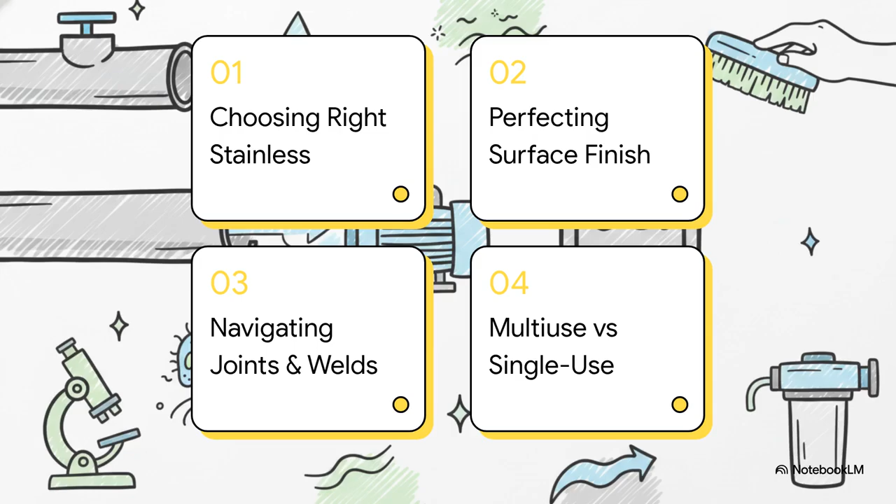Section 1. Choosing the right stainless. Now, you might be wondering, why exactly do we default to such specific materials when we're designing for hygienic manufacturing? Well, it really just comes down to strict definitions. You see, stainless steel isn't just one single thing. It's actually an entire family of iron-based alloys. But here is the kicker, the absolutely non-negotiable part. It has to contain a minimum of 10.5% chromium.

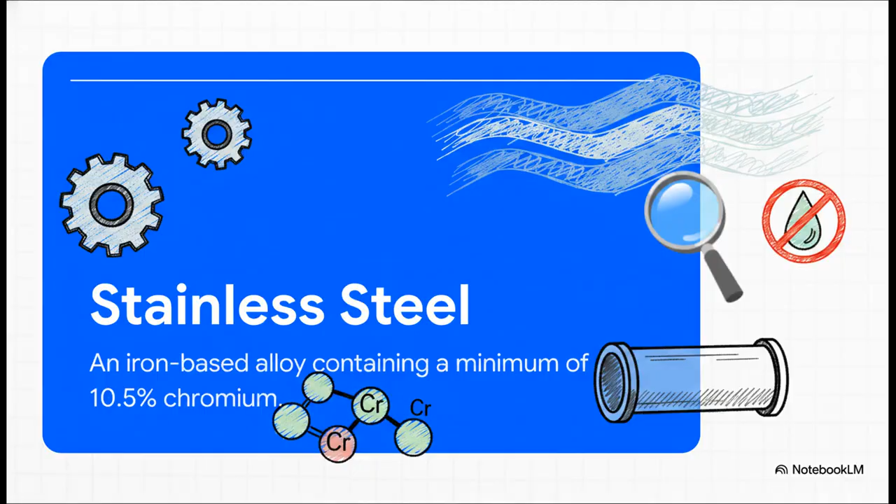That chromium reacts with oxygen to build this passive oxide layer right on the surface of the metal. It's literally like a microscopic, invisible shield that naturally fights off corrosion and keeps our entire system completely safe from those super harsh fluids. Because of that shield, this baseline material is basically the industry standard. Folks often call it the value option since it delivers this incredible built-in resistance to the brutal chemicals and super hot steam we use in sanitary processing.

But, and this is a massive caveat for any engineer tuning in, the raw material you pick is truly only as good as the surface finish you apply to it. Seriously, you could go out and buy the absolute highest performance alloy on the market, but if the surface isn't physically prepped the exact right way, it's going to fail. No doubt about it. Which brings us directly to a super highly searched, honestly pressing engineering question. How do we actually prevent surface contamination?

To answer that, we need to shift gears a bit. We're going to transition from the macro level of picking the material right down to the microscopic mechanics of today's explainer. Bringing us to Section 2, perfecting the surface finish. Okay, to keep these systems totally sanitary, we have to actually physically measure and then modify the metal itself. First, we measure the surface using this neat tool called a profilometer. Basically, it drags a tiny little stylus across the metal, mapping out all the microscopic peaks and valleys along its path. Once we know the exact roughness, we apply treatments to fix it.

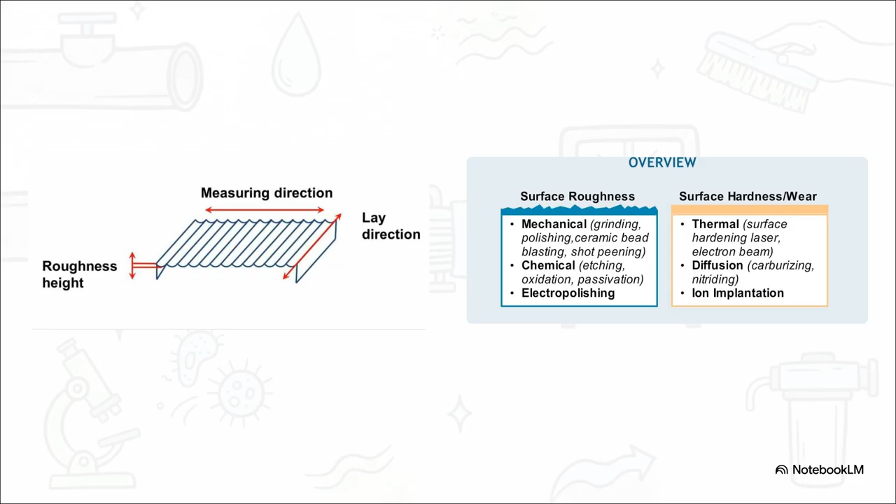A huge game-changing technique in hygienic design is electropolishing. This is a highly controlled electrochemical process. It uses an acid electrolyte and direct current to selectively melt away just the very top layer of the metal. It smooths out those microscopic peaks and valleys until the surface is practically a mirror. And look, a smoother surface simply means fewer microscopic hiding spots for bacteria or leftover product. Makes sense? But hey, what happens when things go wrong?

Let's walk through the common surface defects that engineers are constantly troubleshooting out on the floor. First off, you might spot discoloration from the intense heat of welding, or pitting, which are basically these tiny little voids caused by a localized loss of the base material. But honestly, the absolute biggest headache, that's rouge. Rouge is just a general industry term for a whole variety of reddish-brown iron oxide discolorations that pop up in high-purity systems. We break it down into 3 classes.

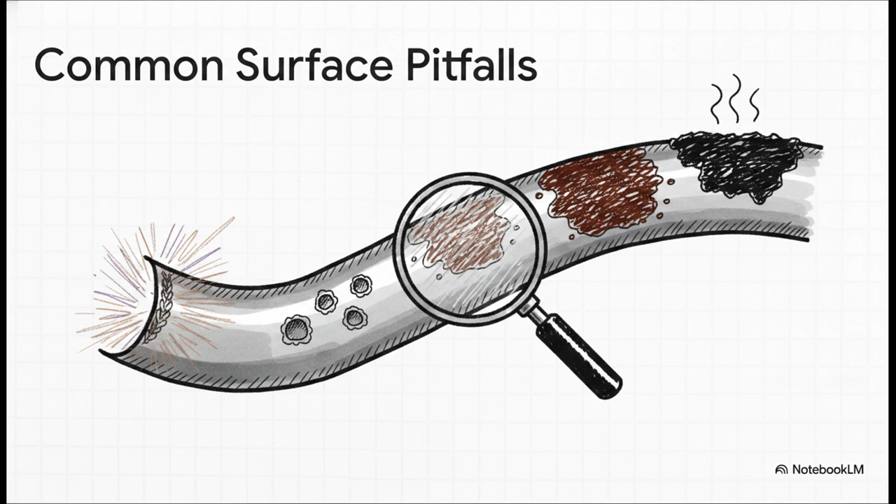Class 1 rouge is loosely adhered particulate rouge. It's usually just traveling from somewhere else in the piping. Class 2 is localized rouge. This stuff tightly sticks to the surface exactly where that passive layer broke down. And then there's Class 3, or high-temperature rouge. This forms a nasty, black, crusty layer specifically in hot steam systems. Let me tell you, managing these 3 classes through proper finishing and chemical passivation is a massive part of your day-to-day job as a hygienic designer.

Let's keep moving. Section 3, navigating joints and welds. So now that we've got a perfectly smooth surface, we have to actually put the pieces together, right? But we've got to do it without introducing any contamination traps. Remember, every single time you join 2 pipes, you're introducing a risk. So we've got 2 main categories of joints to look at.

First up, permanent joints. In this world, that usually means autogenous orbital welds. This is where an automated machine perfectly and consistently melts and fuses the metals together, without even adding a consumable insert or filler. It gives you this rigid permanence and a highly sanitary, perfectly flush internal surface.

The second category? Non-permanent joints. Look, sometimes systems just have to be taken apart for maintenance or reconfiguration. For that, we use mechanical face seals and gasketed sanitary clamp unions. The real engineering trick here with non-permanent joints is that your flat gaskets must sit substantially flush with the pipe interior. You absolutely cannot have them intruding into the fluid path or creating a gap.

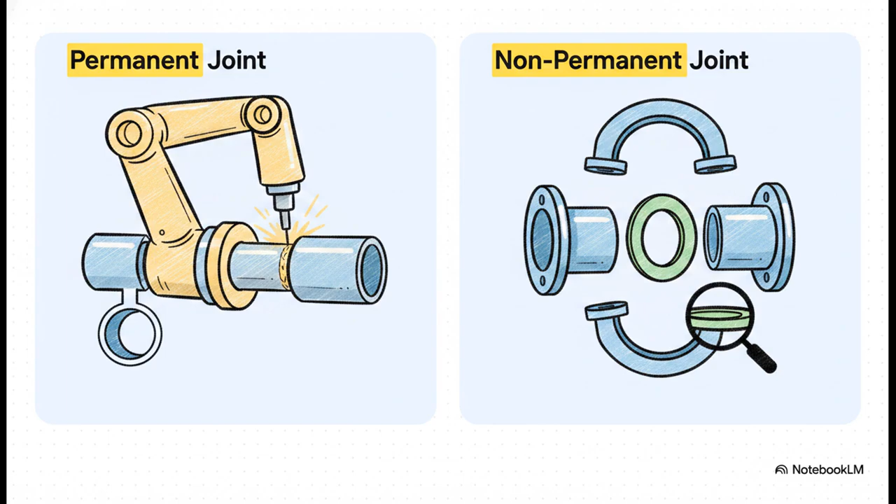Getting the sizing right on these components is absolutely vital. For instance, let's look at standard tubing dimension analysis. A really common size you're going to encounter all the time is a 1 1/2 outer diameter tube. When you're matching up your pipes, hygienic clamps, and gaskets for a 1 1/2 outer diameter system, let me warn you, those dimensional tolerances are incredibly tight.

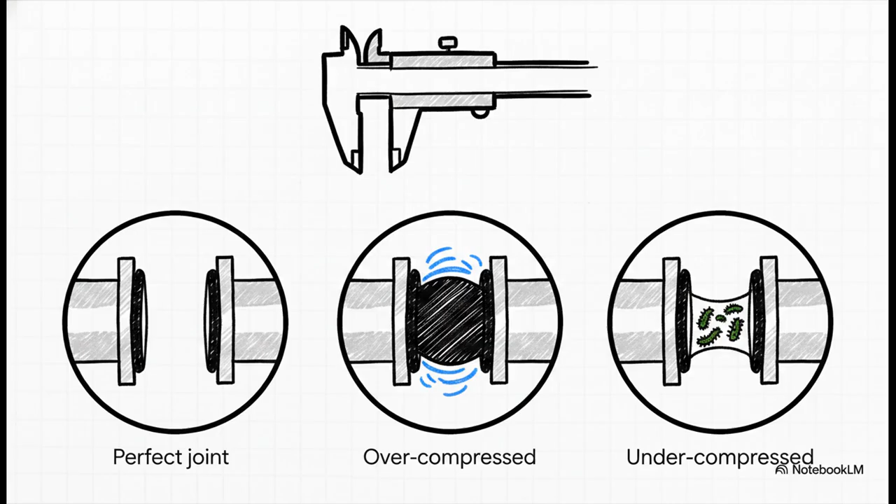If your dimensions are even slightly off, your gasket could overcompress right into the flow stream. Or even worse, it might not compress enough, which creates this tiny, almost invisible crevice. And a crevice? Yeah, that is just the tip of the iceberg. I always warn junior engineers about the absolute worst-case scenario in any piping layout, the dreaded dead leg.

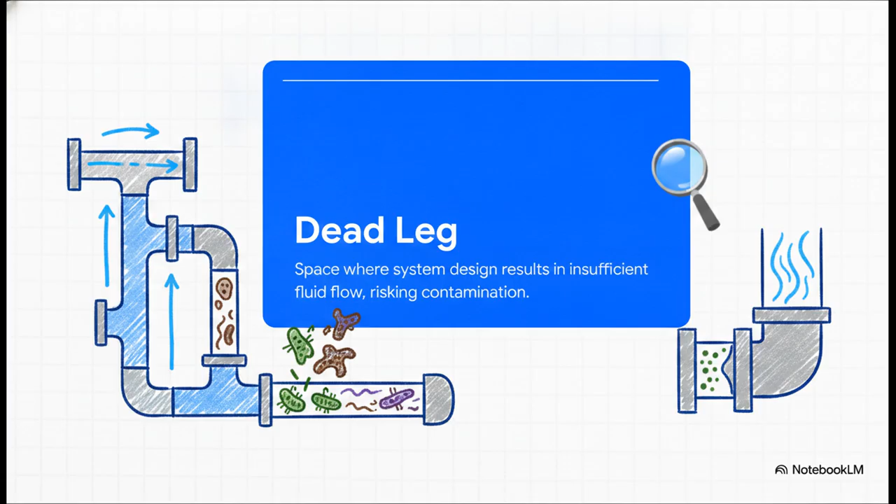A dead leg is a space where your system design results in insufficient fluid flow. Just picture a flow-through T with a blind cap that extends just a bit too far. When you've got poor joint design or unnecessary pipe branches, you end up creating these stagnant little pools. Because the main fluid flow isn't actively washing through that branch, biological and chemical hazards literally thrive there. Bacteria can just colonize the dead leg and continuously reinfect the main system stream. So designing these out of your piping runs is fundamental, absolutely crucial.

Which brings us to our final topic, Section 4, multi-use versus single-use. This highlights a massive operational trade-off that modern facilities are facing today. Traditionally, we've designed these heavy-duty stainless steel multi-use systems. They are built like tanks, meant to withstand repeated rigorous clean-in-place and steam-in-place cycles. You invest a ton of money up front in the metal and that flawless surface finish. Also, you can just blast it with harsh detergents and high-temperature steam over and over again without taking it apart.

But the industry is actually shifting heavily towards single-use systems. These rely on disposable polymeric materials. Think flexible bags, aseptic connectors, and thermoplastic tubing. You use the setup exactly once, and then you dispose of it. You completely skip the steam cleaning, which saves massive amounts of water and energy.

However, your engineering priority completely flips. Instead of stressing out about preventing corrosion, your main focus becomes biocompatibility. You have to meticulously manage extractables and leachables, making absolutely sure the plastic itself isn't shedding chemical compounds into your pristine product. It's essentially a completely different way of solving the exact same problem.

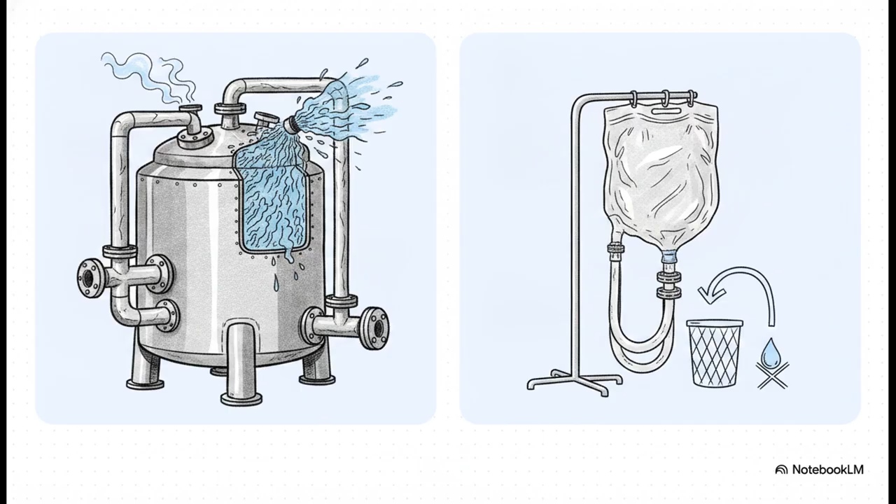As the industry races toward more complex biologics, the big question remains: will the heavy-duty permanence of stainless steel eventually become obsolete? Or will the plastic waste of single-use systems force us back to the traditional ways? Remember, design junkies, master the critical few or the trivial many will master you.